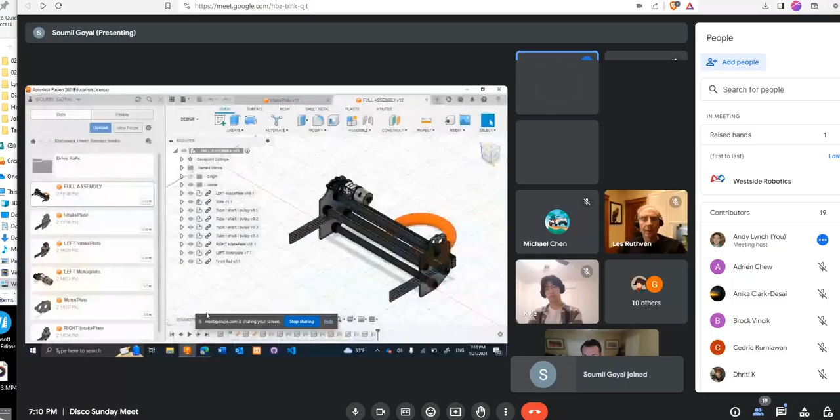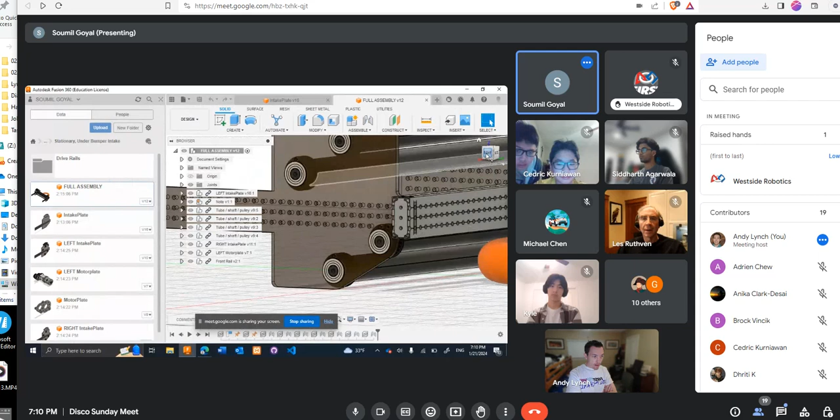So till now, if you look on the CAD channel, you'll see we tested with the old design, but the dimensions are the same as this new design for the stationary ground intake, where we have a 0.25-inch compression between these two rollers, and they grip the note well enough, even without any grip tape on the tubes. They suck the note in and pass it on.

In this region over here, hopefully you can see my mouse moving, is where the belly pan and the robot, like the swerve module, go in this corner and this corner, and this is external. So perhaps the bumper can be reinforced by this max tube that I've just inserted here.

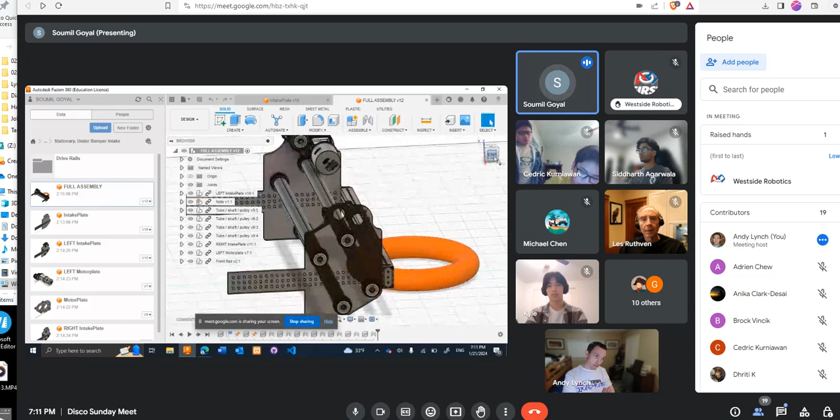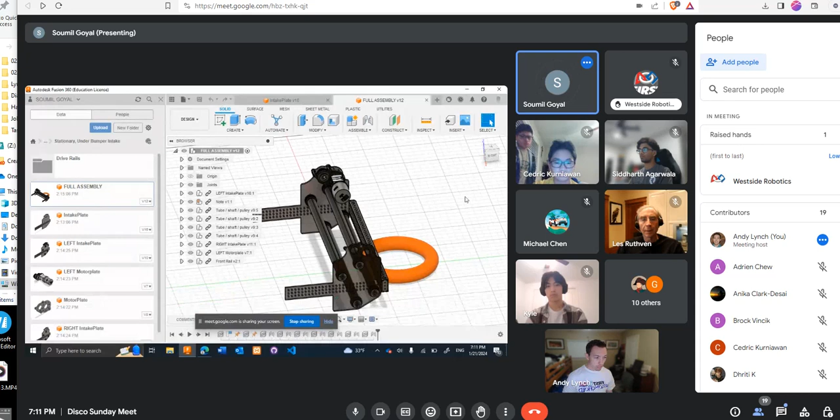So the note goes in and gets passed to something else, which hasn't been fully decided yet—this is the mechanism. In the CAD channel we were discussing whether two sets of rollers are needed or just one set. Those are all specifics to be hashed out later. The main strategy here is that we've finalized on this under-bumper concept, and hopefully we can refine some of these details as we have more of the robot decided. Does anyone have any questions on this design or the general intake concepts?

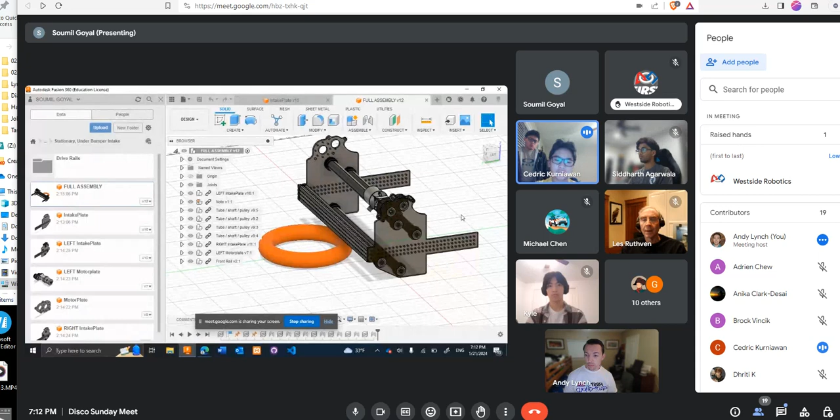Yeah, so with this, I'm pretty sure we already confirmed that our intake is going to extend our drivetrain. So do you have maybe a length or an estimate of how much this is going to add? Good question. Currently in this configuration, it extends 7 inches, from this line to this line.

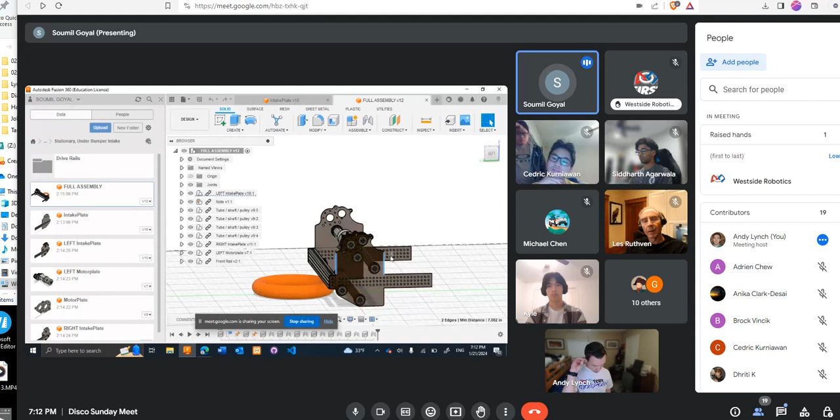But of course, it can be reduced based on what angle we want this path to go up, and also based on how many rollers are actually needed. Imagine if these two rollers were deleted, then the size almost cuts in half. So it depends on all of these things, but if you just go by how the design is right now, it's 7 inches from these two blue lines.

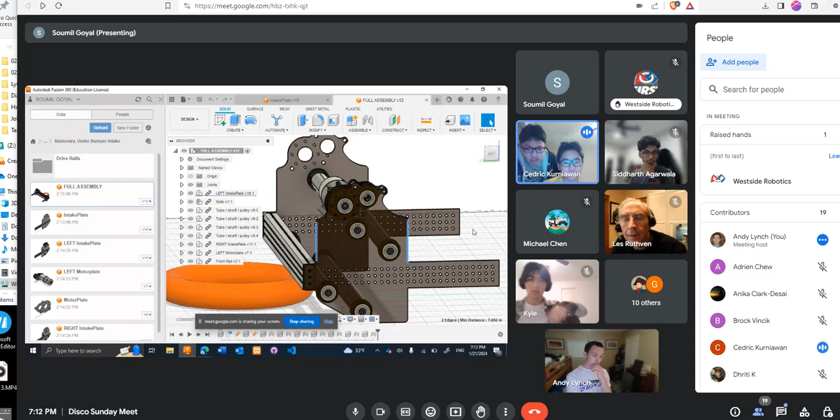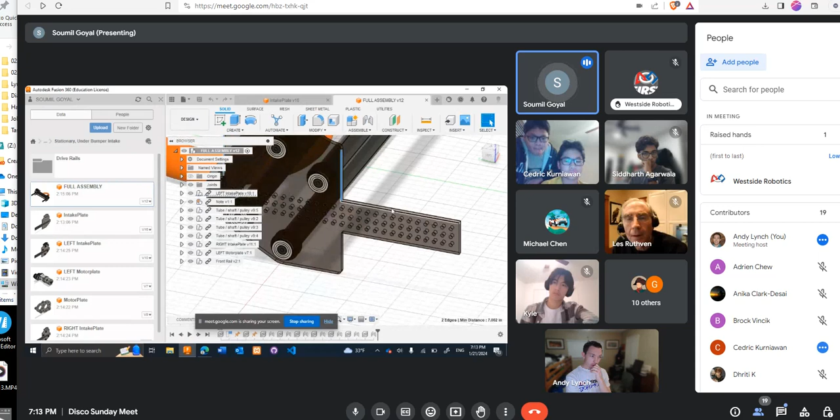Okay, so this mounts to the rails that are holding onto the swerve drive on the sides, right? Is that how this mounts in? I'm just asking how this mounts onto the drivetrain. You're absolutely right. So this extension here, you can see this rectangle just sticking out randomly. This will hopefully screw into the sides of our REV swerve, so it'll be a slight thickness outside of that frame perimeter, but it shouldn't be a big problem.

There's alternative ways to put it too. Like once I have the dimensions of the 1x1 that's supposed to circle our drive base, hopefully Cedric can talk about that later, I'll also integrate holes for that where it can attach to the 1x1.

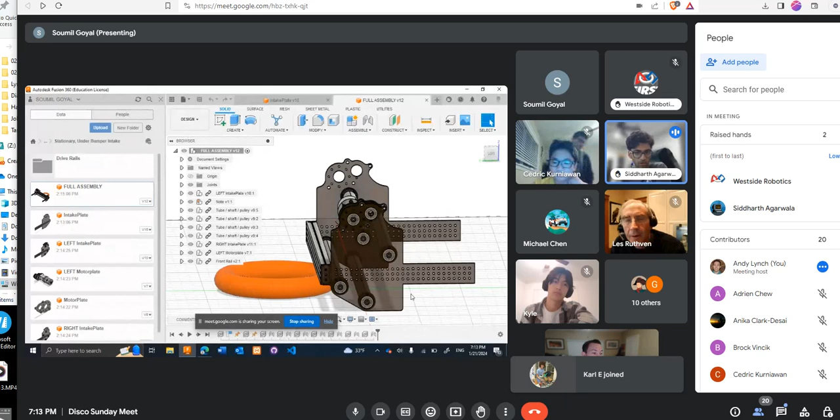Another question, I guess, is one of the points Karl brought up. For bearing retention, you said that you've CADed in the screw holes and stuff. Yeah, and I feel like that works, but there's also a significantly cleaner way to do it with the dead axle system, where you run a dead axle across and then you have the whole tube spinning with a pulley and bearing. Correct, yeah. What do you think about integrating that? Because then it reduces the number of moving parts on the outside of the frame perimeter.

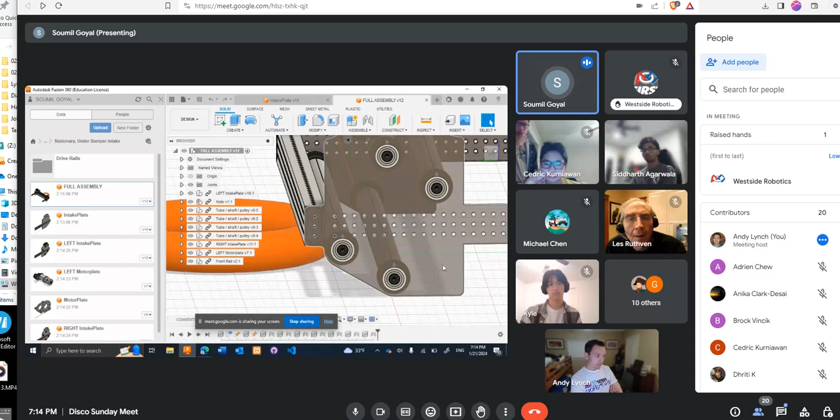I think it can be done, we just have to test and explore it. The reason I did this one right now is because if we want to prototype this and make it on Tuesday at Lamar, it can be done right away because we have all the parts. But in the end, the functionality is the same, right? Yeah.

Cool. Why do you have the motor so high? Why can't we put the motor lower down?

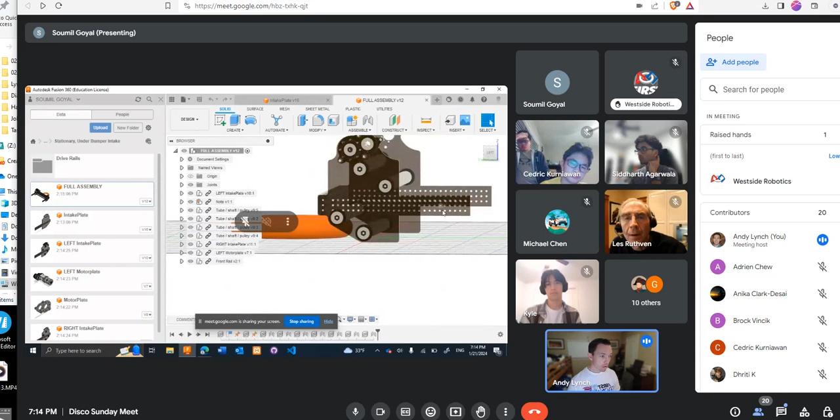Well, there's not much space in other regions. Like if I put it in this area, for example, it's just not thick enough, the motor holes get in the way. I didn't want to put it down just because it's hard to access if we ever want to repair or replace anything. I felt like this was an ideal spot.

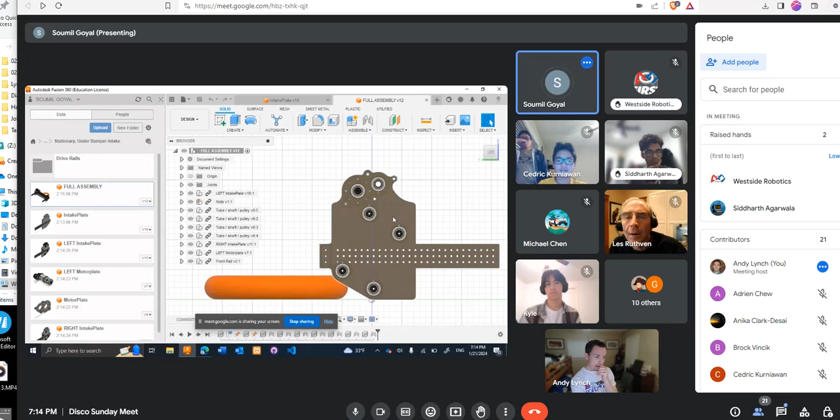Actually, this whole height is 15 inches, so I don't believe it's that high. It might look tall, but it's not that much. If needed, it can be changed. But also the distance is very nice for pulleys, like pulleys connecting to these shafts.

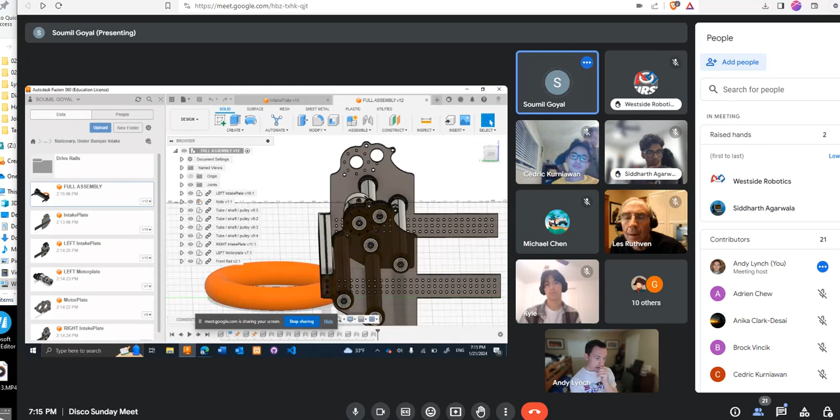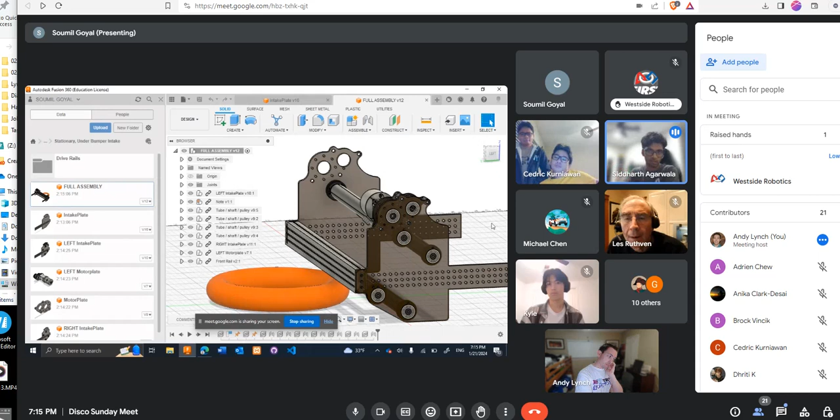I feel like once we have a full robot, with the indexer mechanism attached to it, it'll be significantly easier to change the location of the motor, because I'm assuming the intake motor will also power the rollers inside the frame perimeter to a certain extent. So we can use belts and pulleys for that.

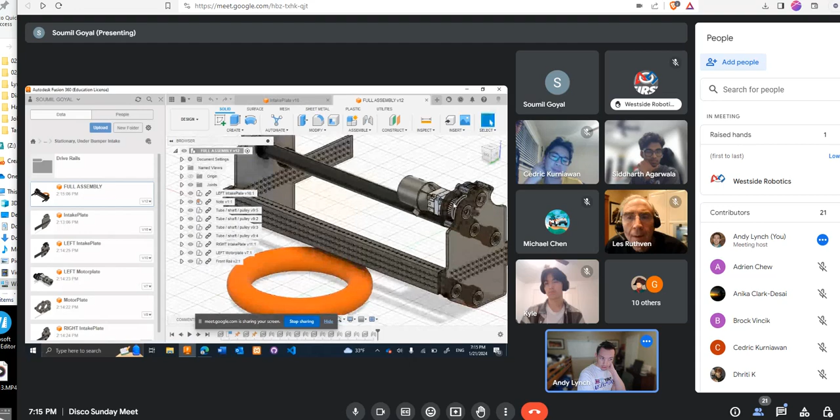Yeah, and we'll move it. It'll be fine for just a test, just to run a real motor. We mess with the Versa that we have, Neo. It seems like Spectrum's running on this direct Neo, so I think this will be a good way to test stuff out. We do have to build more rollers, though.

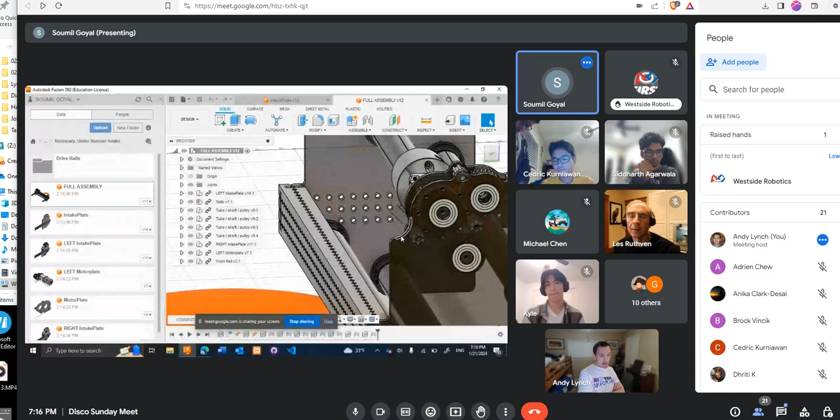Yeah, that's fine. Currently for the motor, you can also see it's inset into the drive, so it's not going to get hit. You can imagine there's 5 inches of bumper ahead of this, plus 1 inch of max tube, and then plus 1 inch of inset. So I don't think it's weak, I think it's just very easily accessible. That's why I like it.

And the center of gravity is not that much affected by it, because it's only 15 inches. Yeah, I think we'll learn a lot from just laser cutting something like this and testing with rollers, making sure we get all the belts and gears set up right.

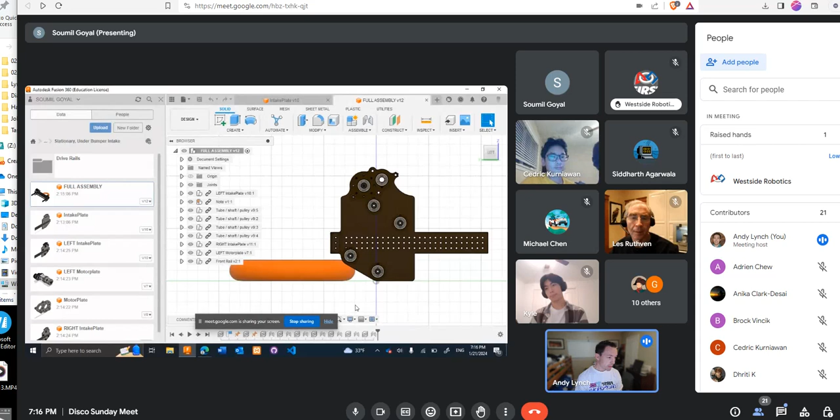Cool. We want to move on to drivetrain unless somebody else has to talk about here. Let's do it, drivetrain, Cedric. Yeah, I'm gonna share my screen here. Okay, so can you guys see the screen?

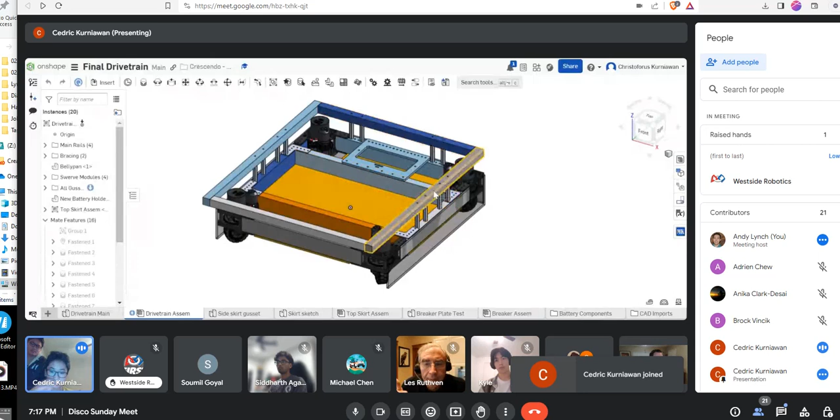Just standard tube for the main drive rails with a 1x1 skirt, 2.5 inches above the drive rail.

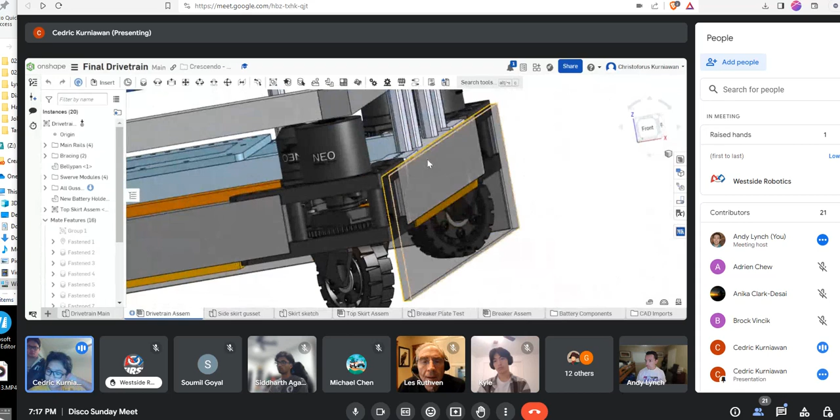One of the things we changed was, before we had the idea of stacking the 2x1s, but I realized that really wasn't needed. So instead we're using gussets, the only reason we use this is to prevent the note from getting under the drivetrain and possibly getting into the swerve wheels. That was our solution to that.

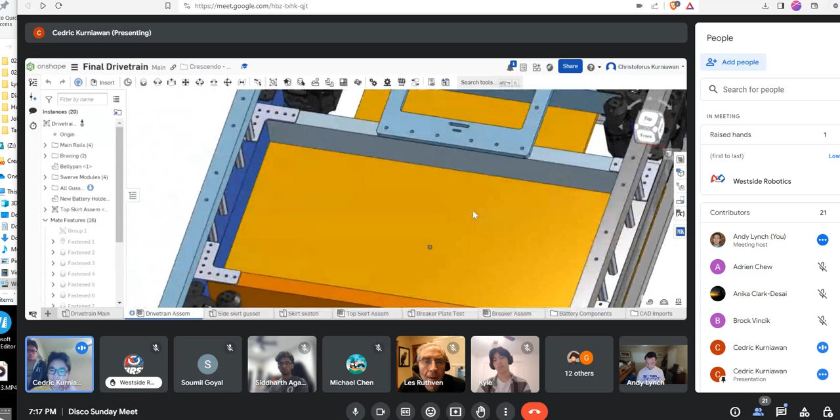And then we decided that the bracing was going to be side to side instead of front to back. We thought that would leave more space for electronics, even though it may make mounting subsystems a little bit more difficult. And then one of the biggest changes was the way we're going to mount the battery.

Originally, from the thing that we printed yesterday, the idea was that the battery would fit in, and a strap would go underneath the belly pan and loop around, like a ratchet strap to strap it down.

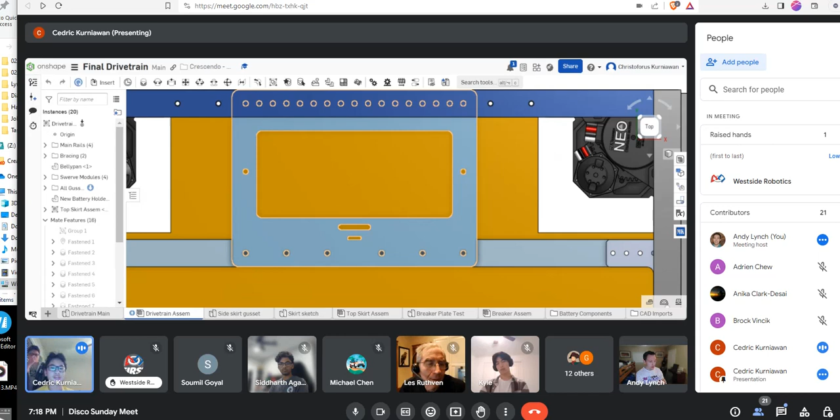But with this design, I tried to use AndyMark's Velcro battery strap. So the battery would sit here, and there'd be Velcro here with strap retention on this side to Velcro the battery down.

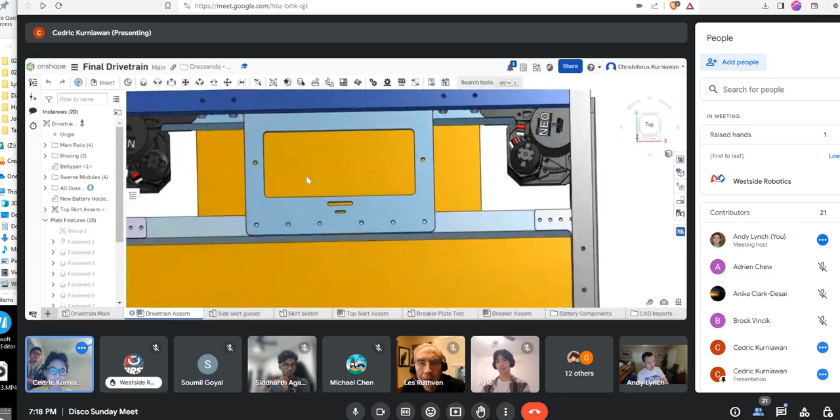And it worked out in such a way that the geometry lined up, and instead of using standoffs and screwing the standoffs in, we can just screw the battery mount straight into the bracing.

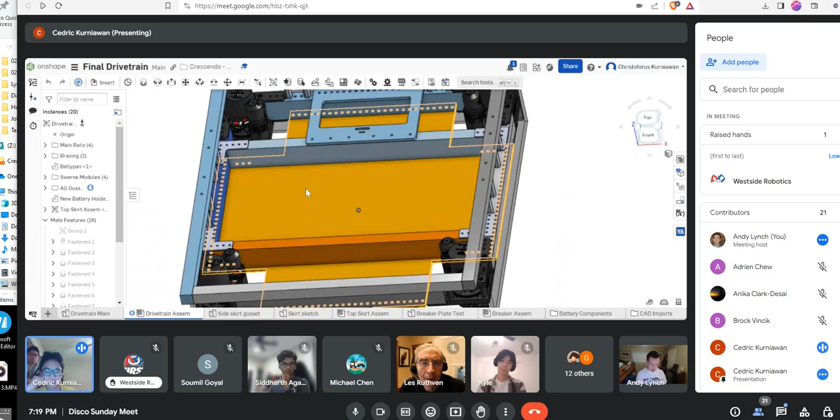And then I think the thing that is missing from here is just electronics, which I haven't gotten to quite yet, that and spark maxes. But other than that, that's basically what I've been up to for the past two days.

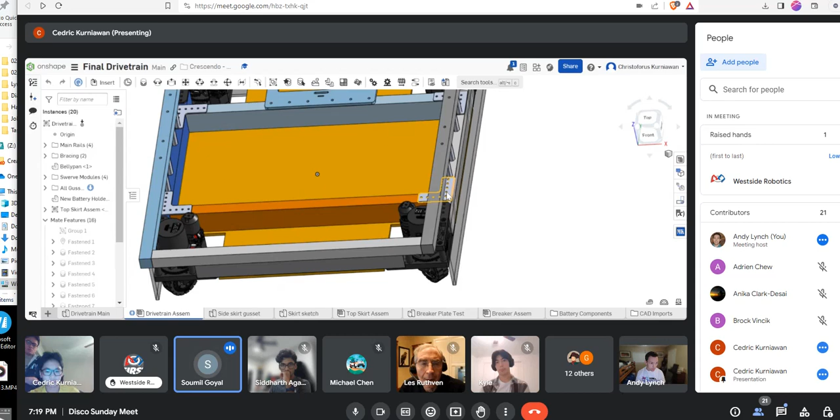I have one question. So these plastic plates you put on the side, does that give us the risk that if the robot tips slightly, we can get stuck with a note under that plate? What if we just printed some type of cover around the swerve module so they don't get stuck in the wheels and leave our belly pan clear?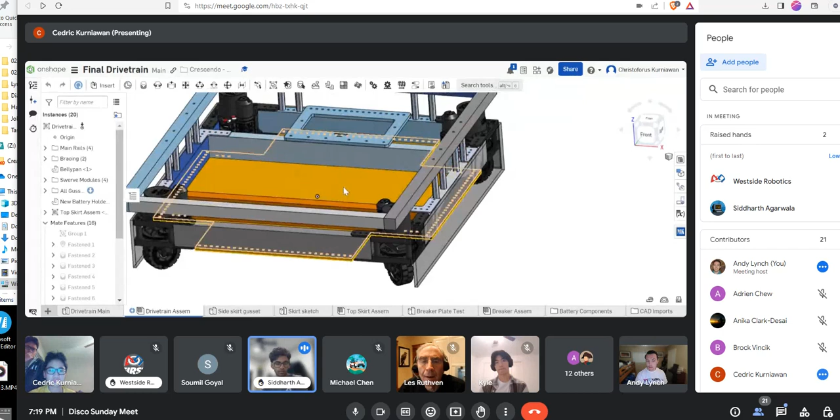This was actually something we talked about on Saturday with Mr. Chris. What we were originally thinking was to have the belly pan super low to the ground, but we decided that came with more logistical challenges than the benefits it would provide. Like you said, we brought up the idea of getting stuck on notes on the field. We said that if in testing it becomes clear we need some sort of guide or guard underneath our belly pan, we can always stick an angle bracket underneath and a thin sheet of polycarb down there.

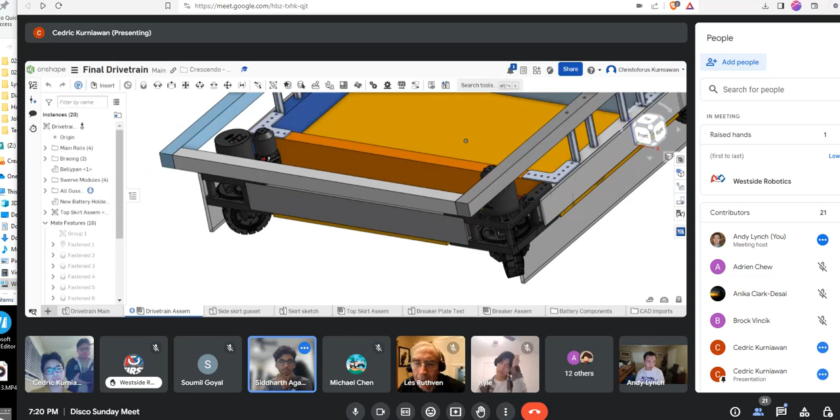Having our belly pan a little bit higher would allow us to have less work on the drivetrain and be a bit easier to work on for real. Yeah, no, I like the belly pan being high as well. I don't think it needs to go down.

What I'm saying is that this rev swerve gives you 2.75 inches of clearance. So technically, if you had nothing, not even the plastic sheets, you could completely drive over a note and be fine. So the only risk here is having a note getting stuck in your wheels, not at the bottom of your robot. So if you 3D printed something just around the wheels, you won't even risk being stuck on a note with the plastic.

You might still wedge on a note, you won't ever have your wheel stuck on a note. It might wedge in there, but the idea is your wheel ending up inside of the note is what we're trying to avoid, because the note is like a torus.

Right. I think what Tom was trying to say is he's concerned that if our robot tips a little bit, the note gets stuck where this thin plastic sheet goes in between one of the notes. Exactly. So yes, where it gets stuck, that gets pulled upwards, right?

And the thing is, I think from what we've seen online, the note glides so easily on the ground that even minor contact by something like a little piece of plastic will push it around the field.

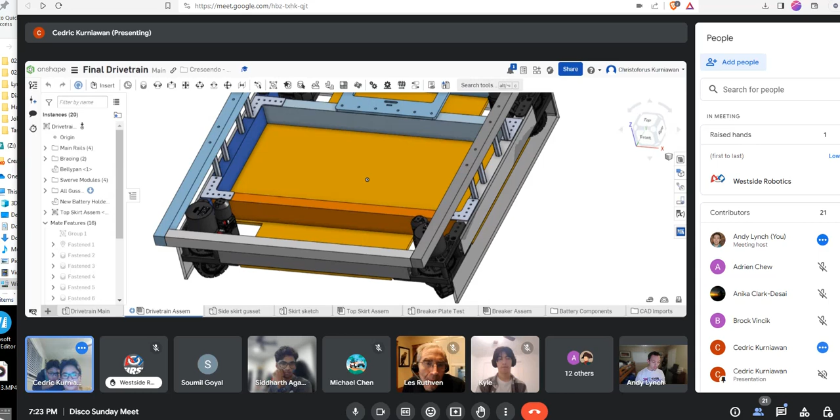I think integrating the breaker plate and the skirt looks like a good plan, all in one piece. I think somehow just hand off what you have, and that's fine.

Final measurements. Drivetrain. Change those dimensions. Sounds good.

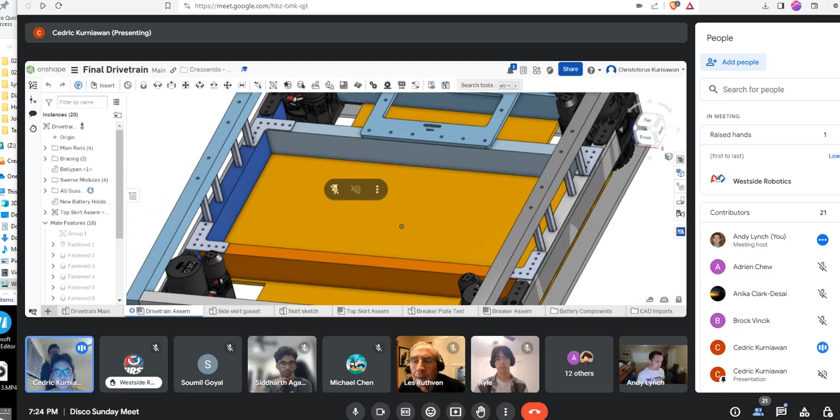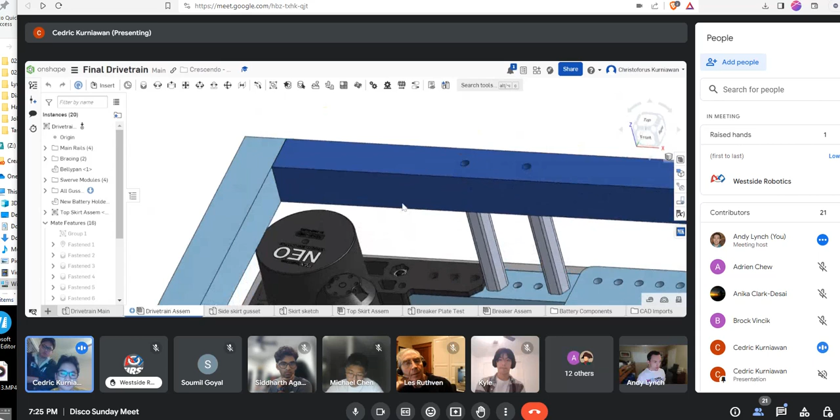Do you guys have standoffs here on this bumper rail? So for the skirt, originally we had 2-inch REV standoffs, but when I tried to mount it, it didn't really have interference, but it was basically flush with the Neo, and we thought that was a bit too close for comfort. So these are WCP 2.5-inch standoffs, which I don't know if we have, but they're just tapped Thunder Hex.

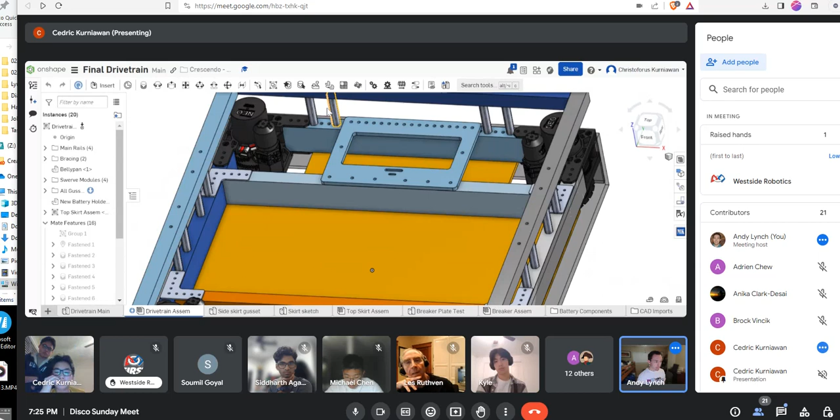Yeah, probably, there's a lot of... And then the battery strap, I don't know if apparently Greg said we have one at Lamar. We know West Side, we have a couple at West Side. Can you open the website for it? It's right here. Alright, let me stop and share again.

So this is the idea, this is what I'm thinking of using to strap the battery down. Yeah, this is pretty much it, certainly.

You guys have anything else you want to share on this? Can we take one last look at that real quick? On the battery strap or on the standoff? So I'd like to make a comment.

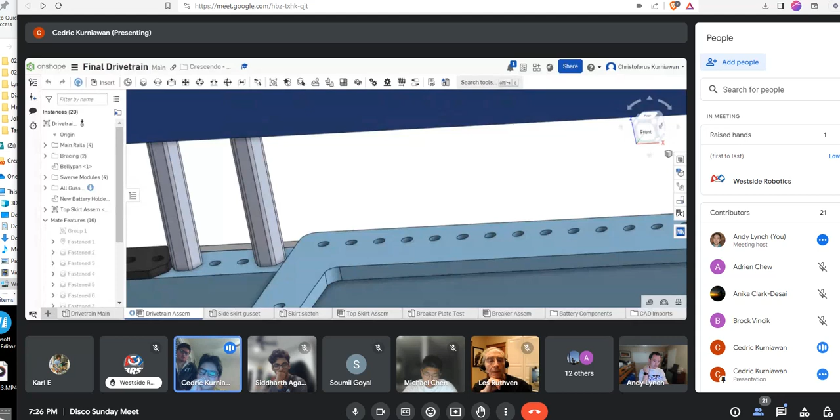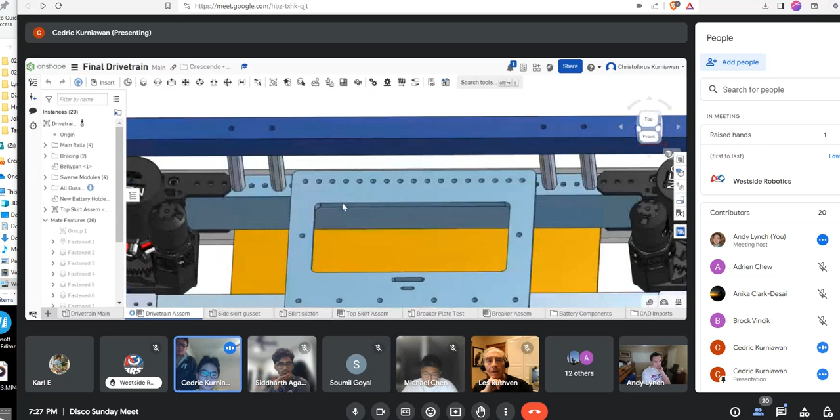Just curious, how are you planning to connect those three pieces together: top rail, standoff, drivetrain rail? Long screws. I'm not quite a fan of that. I was going to suggest, can we use more pieces of 1x1 stood on their ends vertically and then T-gussets to connect them? Do we have space to do something like that? Yeah, we should, we'll have to modify that.

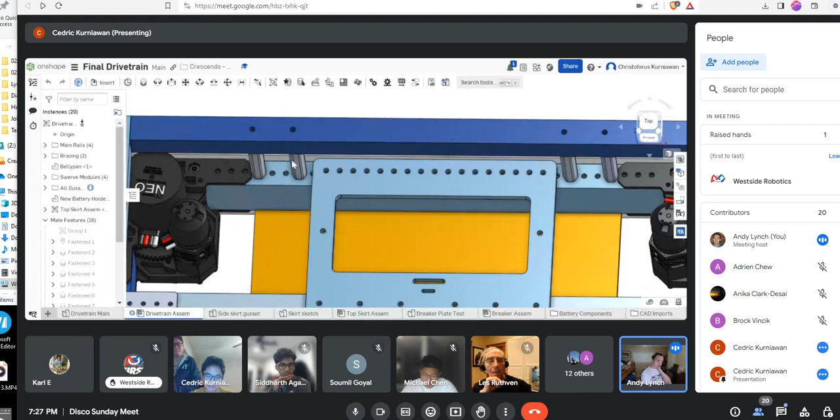Actually no, that should fit. Well, something to consider, I think we're going to have a lot of loose and bent bolts in our future because of that. Maybe, yeah, write that down. Yeah, I want to hide a little bit of stuff too, so it takes a little bit more. Definitely, we have...

You can also rivet that. Probably will have to do with that. Yeah, okay.

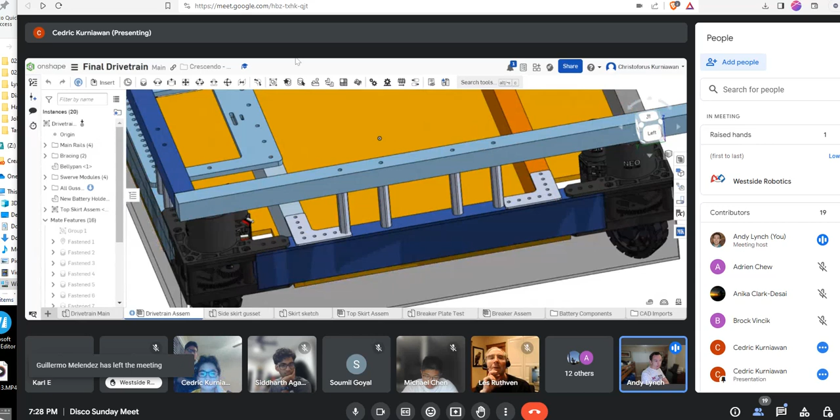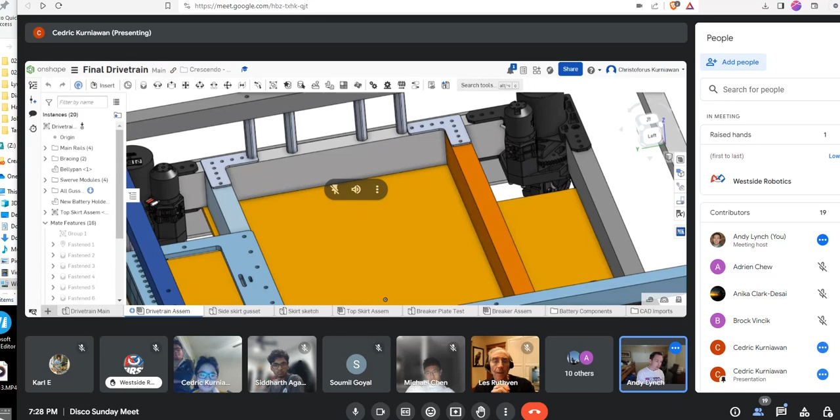Let's look at some other teams. Or even, I think for example in this, where these four standoffs are, you could probably just use more 2x1 and then put a gusset on it. Maybe, I don't know, yeah, so that's what we're talking about. The upper rail itself is a 1 inch by 1 inch square. So we're placing the standoff, it's circular, it's just more of this 1 inch by 1 inch square. So that's what we end up doing.

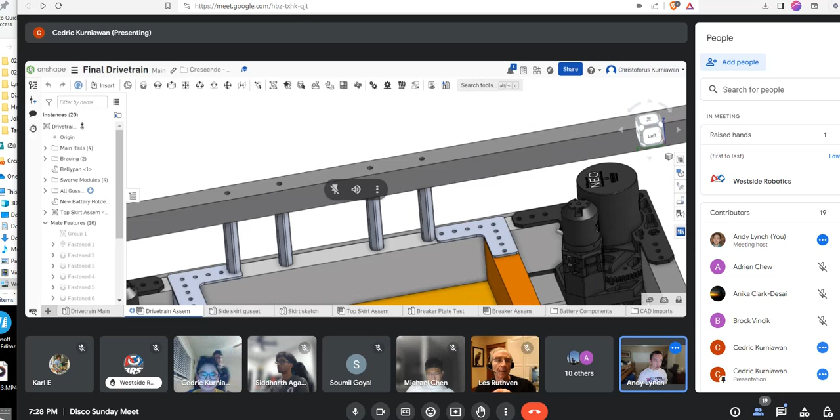I got it. Let's, in the interest of time, we'll get to the...